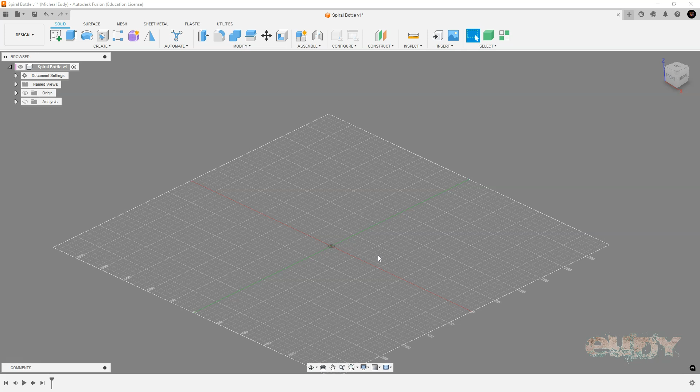So first of all, we need to make a bottle. So let's come in here and we'll do a sketch from the front and start off base here. Top of the bottle, and we'll go with something like this, and then we will...

Okay, then we're going to set a dimension on this. And I'm going to switch to inches. And so let's say this is going to be, I don't know, let's make it maybe, we'll say 10 inches. So we'll make it 10 inches.

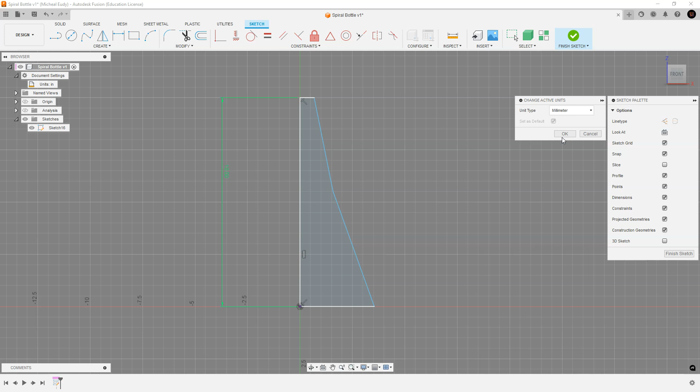All right, I'm going to switch that back to millimeters. And let's move it in just a little bit. Maybe move this in a little bit. And we need to fillet that junction right there.

Why is that giving me a hard time? Okay, I think I'm going to pull that in, so more about like that.

Okay, and then maybe fillet there. Okay, I like that. Then we need to put a fillet here.

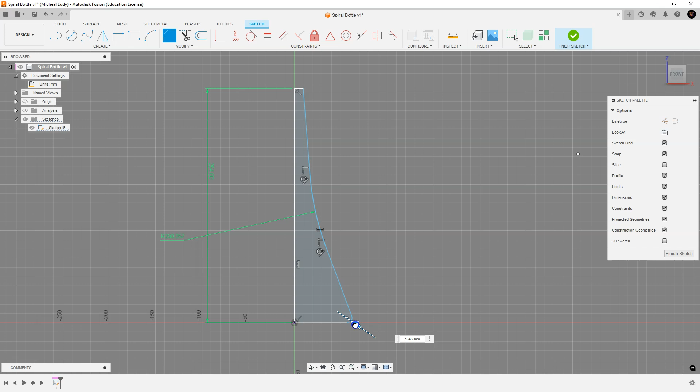As a matter of fact, I think what I might try to do is maybe I'll bow the bottom a little bit. So let's do a 3-point.

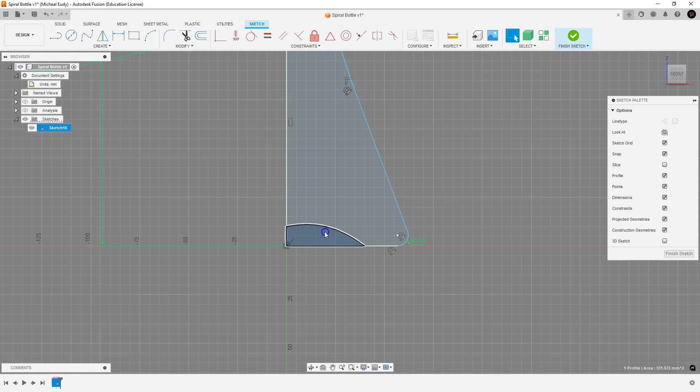Actually, we'll just do. Just do us a curve from here. Like this. I'll pull that down a little bit. Okay, we can trim out.

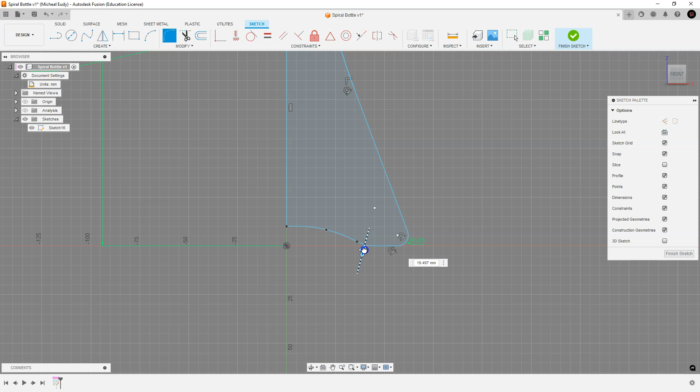And let's trim this one in there. And then maybe a little roundness right here. And that'll give us a good foot.

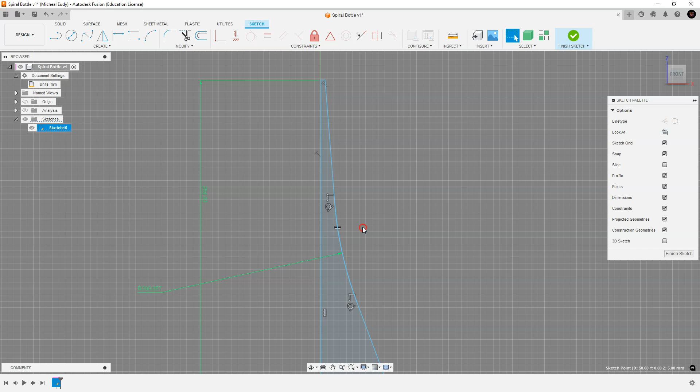Okay, so let's try that. Okay, I think I'm going to try for that. I'll always come back and adjust it later, so we'll finish that.

And then we're going to do a revolve. So, and pick our pivot. And so we got a bottle, something like this. Actually, I think that bottom's a little wide.

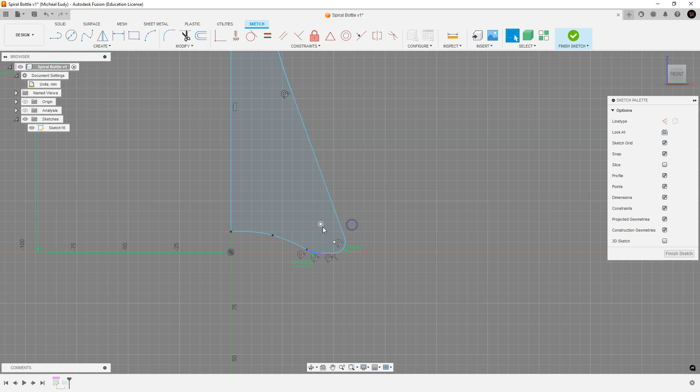Let's go back and edit sketch. And I want that. Maybe not as much. Oops.

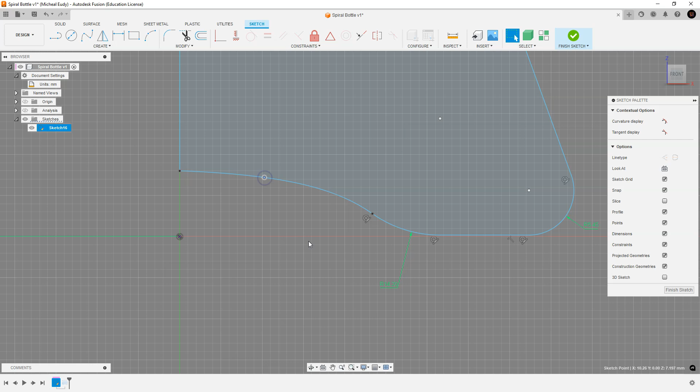By the way, if you hold down the control key when you're moving something, you can temporarily turn that snap off.

And maybe make this a little bit smaller. All right, maybe that. Yikes.

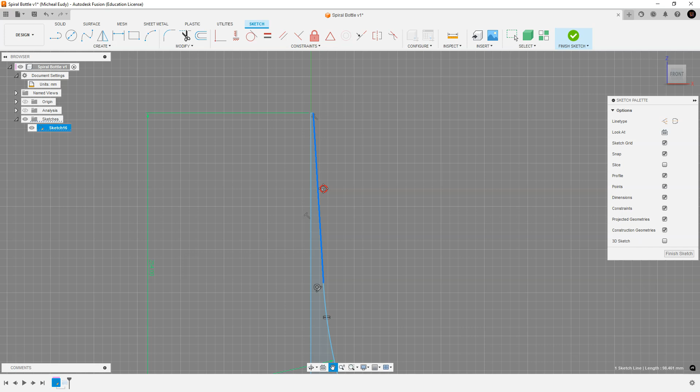I'm overly constrained here, so. All right, I think I'm going to go with that. Okay.

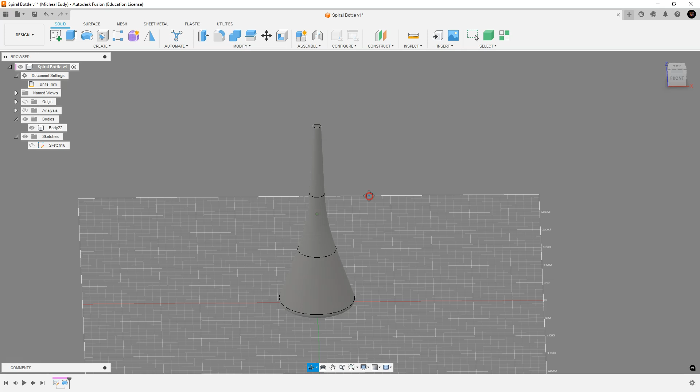So there is our bottle. Yeah, still think that's too skinny. Yeah, there we go. That's better. Okay, we'll go with that.

All right, now we got to cut a spiral through this. So to do that, we're going to create a new sketch from the front.

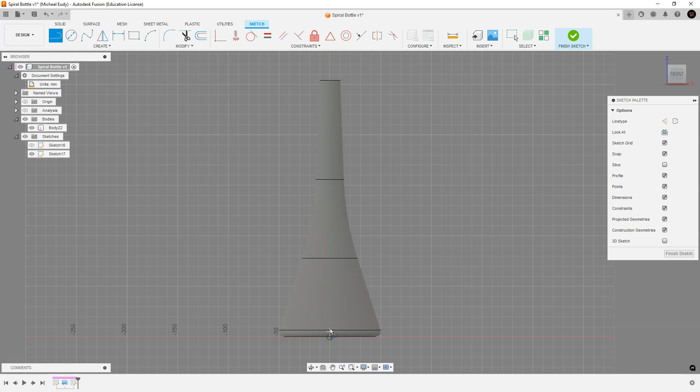And I want this sketch to be a straight line down the center. I want it to be past the bottom here, so I'm going to go right about here. And then I don't want it to go all the way top because this is going to be the path of the spiral, and I need space at the top where I can put some, actually we'll just extend it.

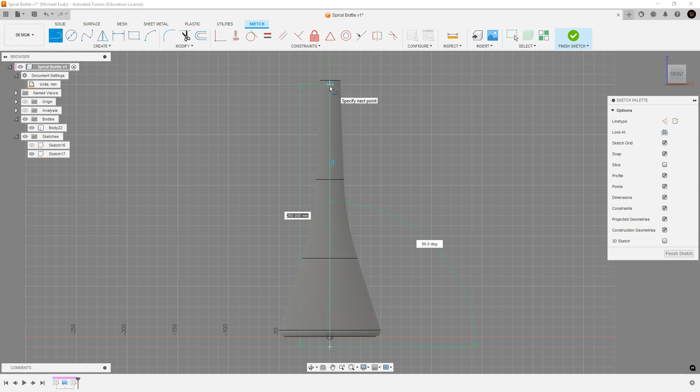So we'll go right about here. I don't want to go all the way top, and the reason is that I'm going to extrude the top up to put the threads on it. So I don't want it to hit this top piece. So I'm going to go right about there.

All right, so now I need to put a line out here, and I need this line to go out far enough that it's further out than the bottom. Okay, it's got to be further out than the bottom. It can go too far out. So, you know, it's okay if it's further out. Something like this.

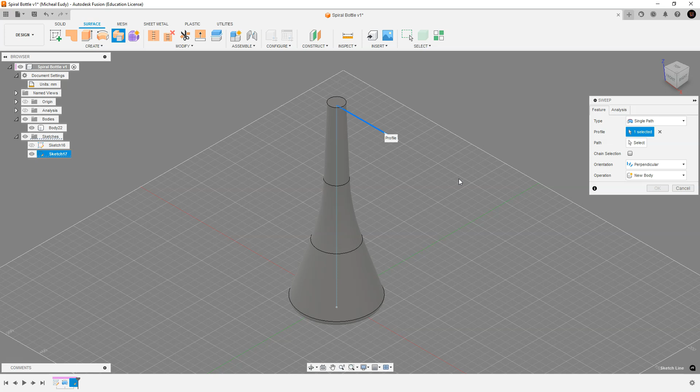That looks pretty good. All right, so now what we're going to do is we're going to use a sweep for this, okay? But what we're going to do is use a sweep not with the solid modeling tools, which is in here. We want to be with surface here, and we're going to do a sweep. Okay, so it's going to pick the profile, which is this, and then the path, which is this, and then it's going to make me a sheet that goes straight down.

Now the trick is that I can twist this sheet. So over here, you'll see there's tools for a twist. And so if I type in something like 360 degrees, it's going to twist around it.

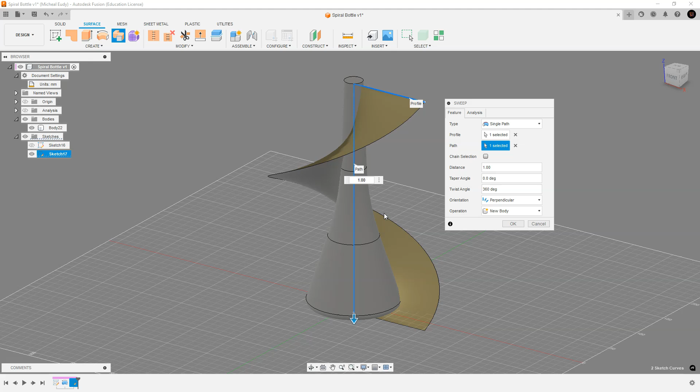And I'm going to do 3,600. It's just according to how many grooves you want to cut in it. Maybe that's too many, let's go 2,400. And so you're doing this spiral, and that's where we're going to cut into this.

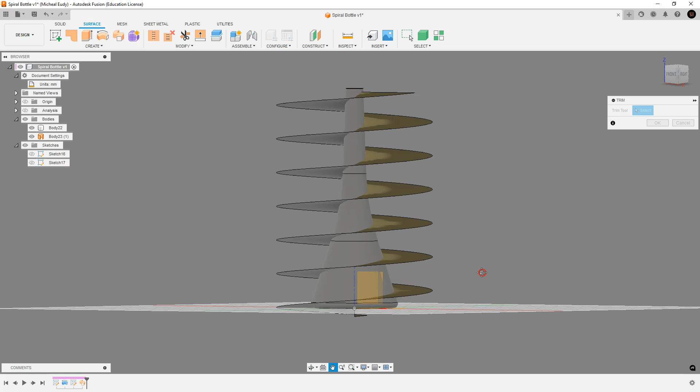All right, we're going to click OK. Now, while we're in this surface modeling, we're going to go here, which is trim, where we can trim this. So what we're going to do is pick the centerpiece. Now, yours might be able to pick the whole thing, but it might go in pieces. Okay, so I'm going to pick that, and then I'm going to pick this, and I'm going to hit OK, and it's going to trim that. So it's going to trim it up to the edge of it.

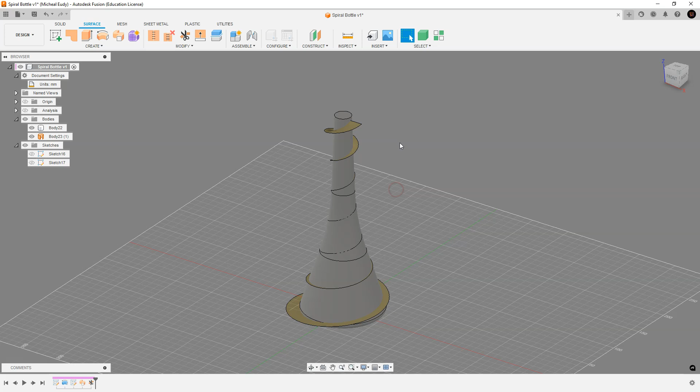Now, we may have to do a trim a couple of times. So we may come in here, repeat this, and pick this top one, and then pick this, and cut it off there, and then we got the bottom one too. Let's turn off this grid for a second. So I'm going to repeat that, pick this, and then pick this, and then that'll cut that all the way through there.

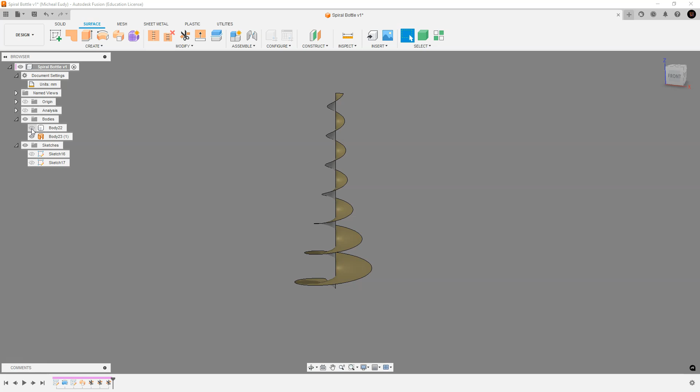And that'll be fine, that's going across it there. This piece out here will be fine. Okay, so what that's done is created us a little spiral. We can hide the body here. We created a little spiral in which the edge of it will match right onto the edge, matches our shape here.

So now what we're going to do is we're going to create a new sketch, but we want to do an offset plane to sketch on. To do that, what I'm going to do is do a construction plane, but I'm going to do a plane along a path, and then I'm going to pick this path, and you will notice that it broke right here.

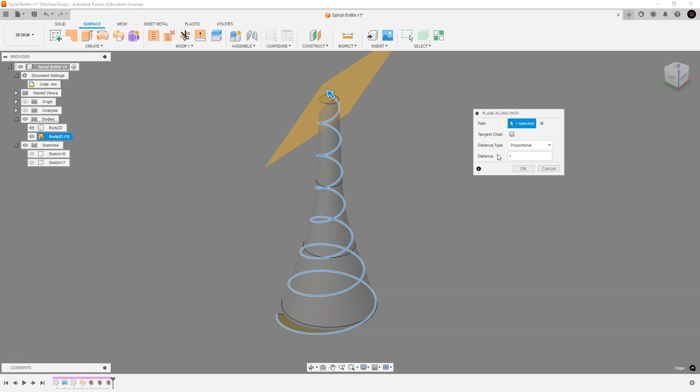So I'm going to hold down the control key. I need to pick the whole path. I'm going to pick control here. Make sure you've got the whole path picked. And then on our distance here, we need it to be 1, which means it's going to put it up there at the top. So it's putting us right up there where this starts, right at the tip of where the spiral is.

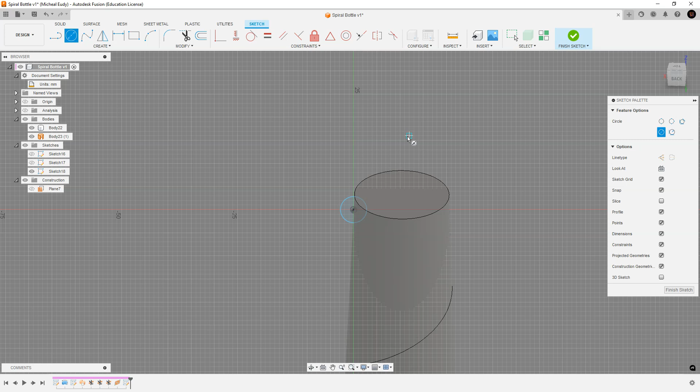So I'm going to create a new sketch, and it'll be at the 0, 0 right here. And I'm just going to create a circle right here. And we can always come back later after we do this and adjust the size of this circle if it's too big for the cut. Okay, so we'll finish that.

All right, so now what we're going to do is we're going to go to solid modeling now, and we're going to create a sweep. Now it's going to want our profile, which is this circle, and then it's going to want our path, which is this. And I need to make sure I hold the control key, and then I pick the entire path.

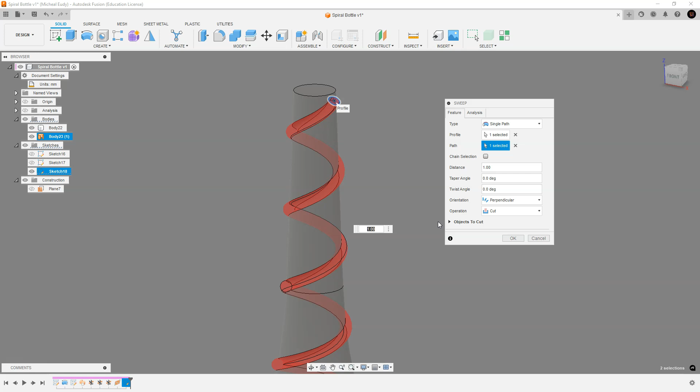And then it's going to cut through it. And that's probably fine. I'm going to click OK. And then that's cut into that in a spiral. And we can turn that body off now.

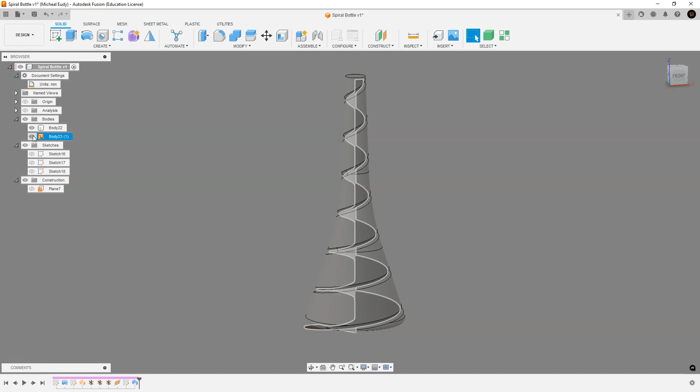All right, then we want to pull this up a little bit. It's going to be a little close there, maybe that. And then I need to put fillets on this, so I'm going to right-click a fillet, and that'll go all the way down. And I have no idea how big this is, so it's going to need to be much bigger than that, so maybe 1. Might go a little bit bigger than that.

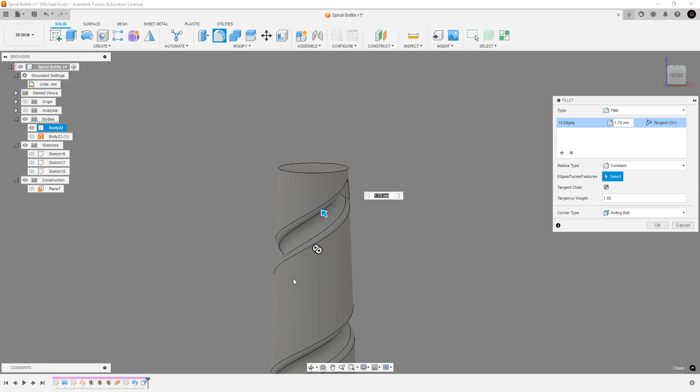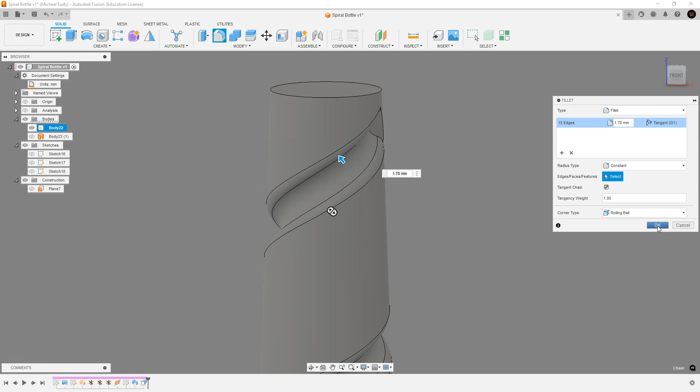Yeah, I think I'll leave that. Put that in. Then I'll need to put a little fillet on this, around this. So what we want to do is there's kind of a sweet spot where we get rid of that flat spot in there. So let's see what it is.

Just a hair over that. Oh, you dog. Too much. So sensitive.

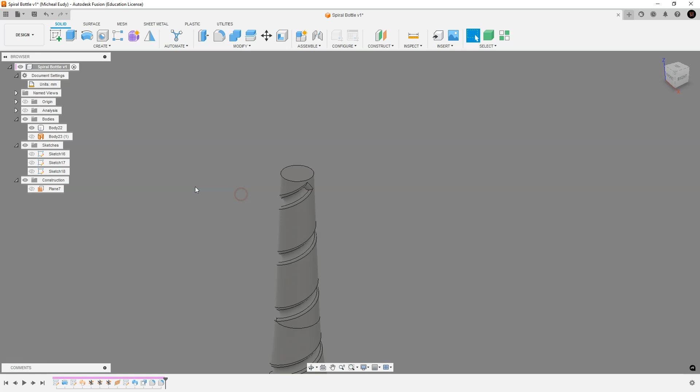Okay, and then we would come in here and extrude for the top. And initially, I would say don't join this - make it as a new body. We'll join it back in a second.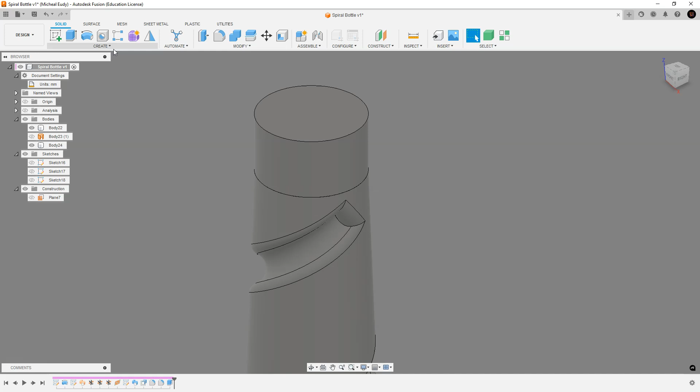All right, I need to create a sketch on this top. And the reason we're doing that is we need to put a point on that. And then we're going to create a thread here, model there. I'll go ahead and leave that on the default right now. We need to put a - oh, I already have it in here.

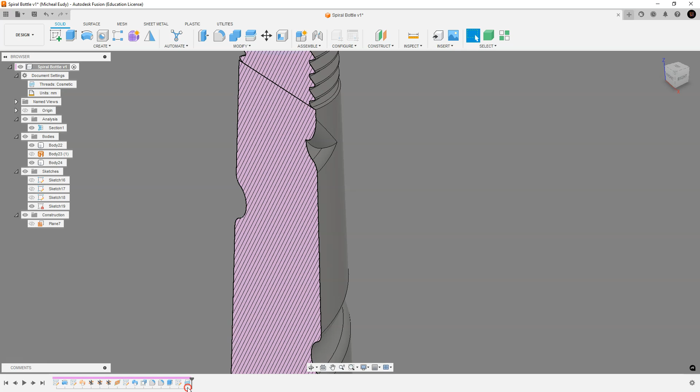We need a section analysis. Okay, I need that so that I can tell how far we're pulling it out.

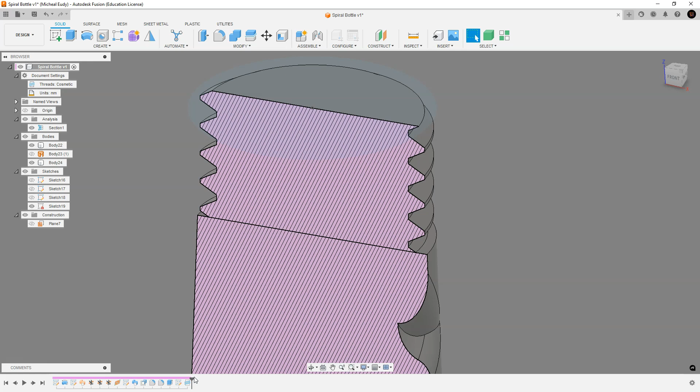And actually, I think what I want to do is hollow it out first. So I'm going to roll that thread back and let's make it hollow, and then put the thread in.

So let's give it a thickness. And oops, I want the thickness - go here. Let's see how thick I want to make this.

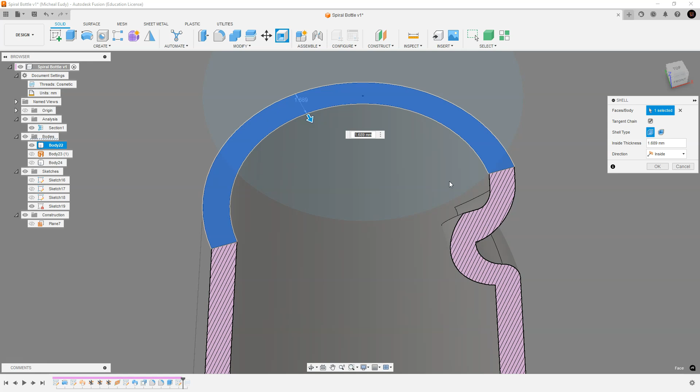That's not bad. Let's make it something that we can remember. We'll go 1.7 so we can remember what it is. And click OK.

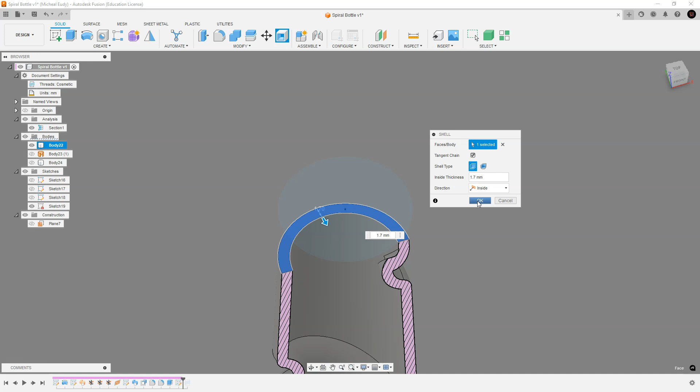And then we'll do the same to this one - and 1.7.

Well, I can't do that. All right, we're going to just delete that. And let's do an extrude from this surface.

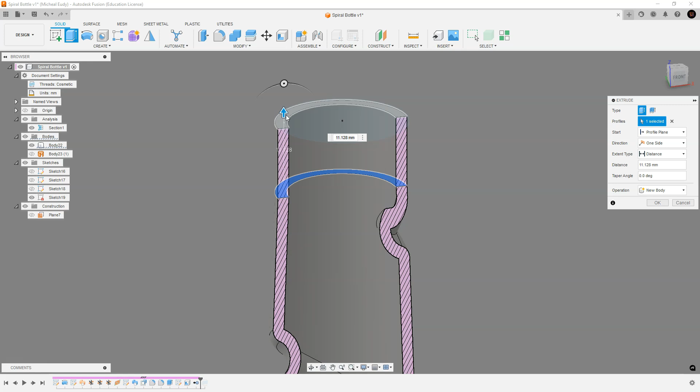And we're going to do it as a new body - yeah, that's what we want to do. Okay, that'll work better. All right, so now let's put our threads on it.

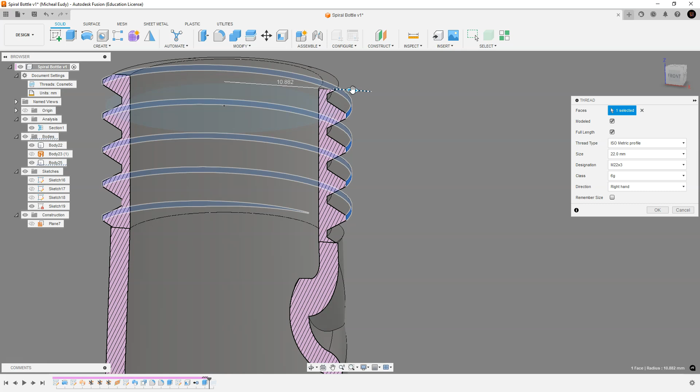All right, so now we need to pull this out. I want it a little bit bigger. It's too much.

That looks pretty good. All right, let's go with that, because that will work with our liquid.

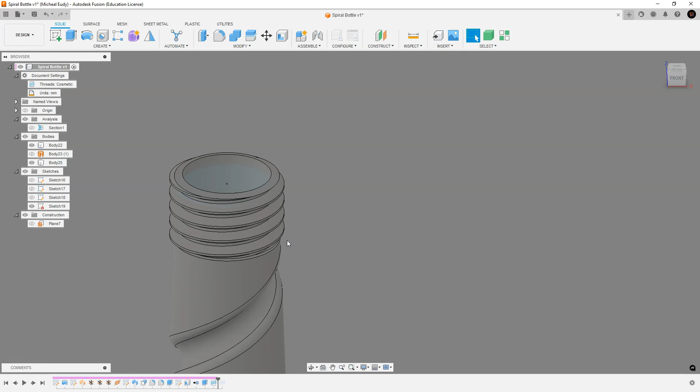Okay, then we can join these, this one and this one. And we want it to be joined, not cut. Click OK.

And it didn't join it, and the reason is - let's try it again.

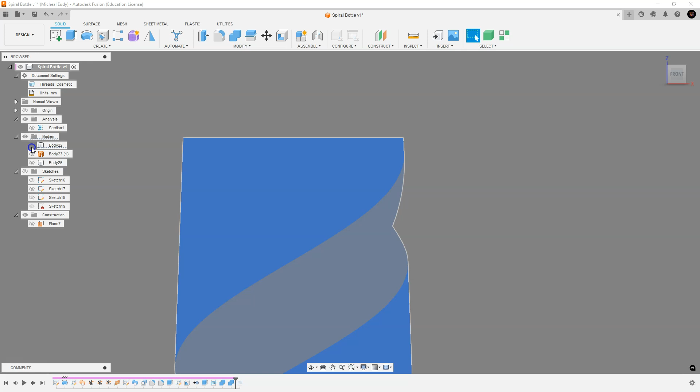Okay, the reason it's not joining is that there's a little bit of a gap in there, so what we're going to do is go to move. Go here.

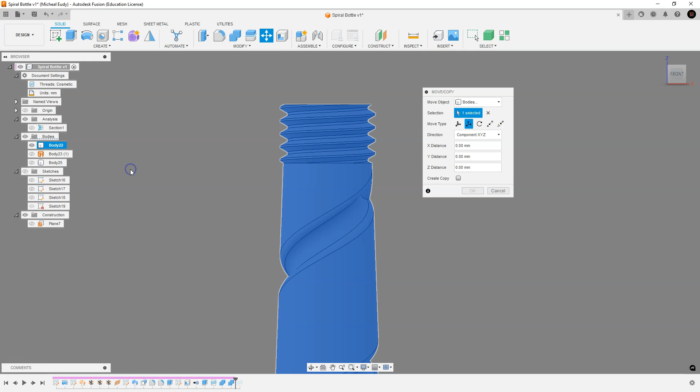Oh, it did join it. All right, it made me a copy of it, is what it did. Okay, here we go.

All right, let's take it over here and let's look at it. Go to our render settings.

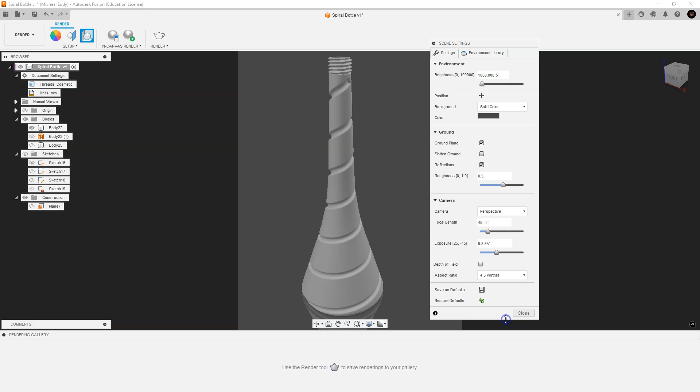That's a tall bottle. Let's go here. We got it on the... that's probably all right. Let's hide this down here.

And let's put a glass on this. Okay, let's see what we're getting here. Okay, that's looking pretty good.

All right, let's go make liquid for it.

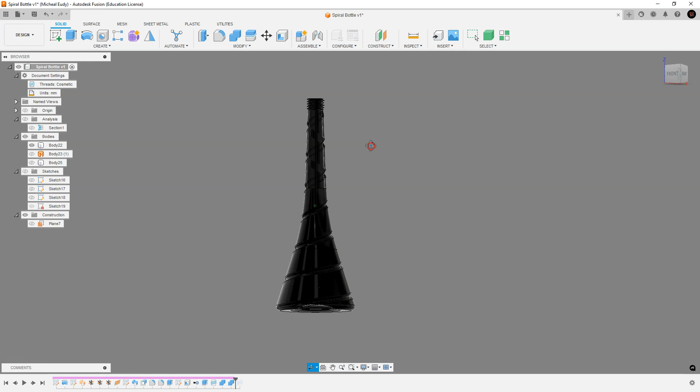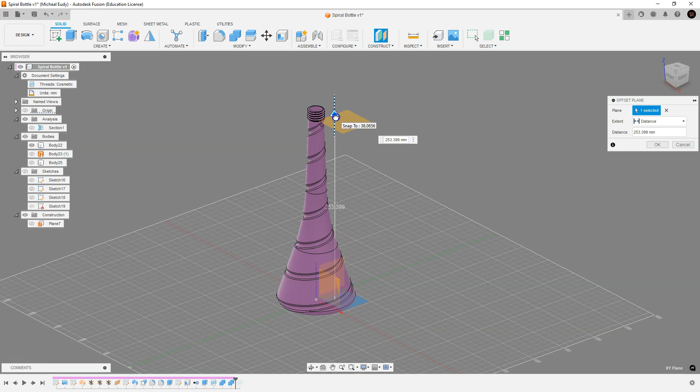Okay, let's turn on our color here, and then we're going to make us an offset plane from the bottom to where we want the liquid to go to.

That's probably okay right there. Okay. Yeah, that'll look good. Okay, so we're going to do a boundary fill.

So boundary fill - pick the top, pick here, and then we're going to select the cell that we want, which is this top one right here. And click OK, and that'll make us our liquid.

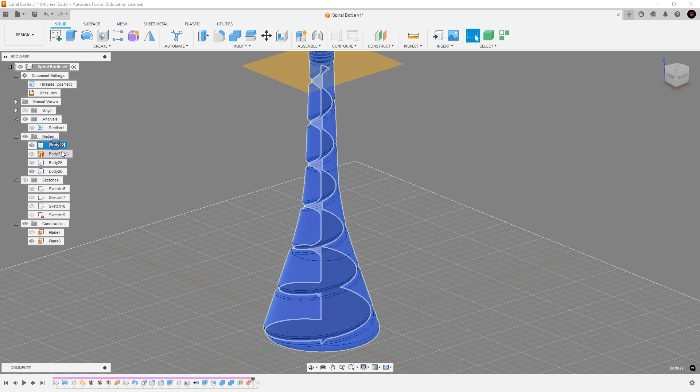So this is our bottle, and this is our liquid. All right, so...

It's kind of odd how it didn't fill it in - it just kind of cloned it. All right, so let's see how we're going to fix this.

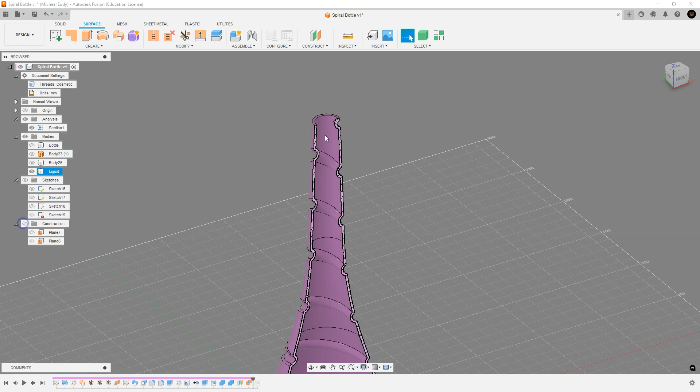Okay, this is what we do. Go back to surface - we don't need that construction plane anymore. So what we want to do is delete the top, and that'll give us an inside and outside.

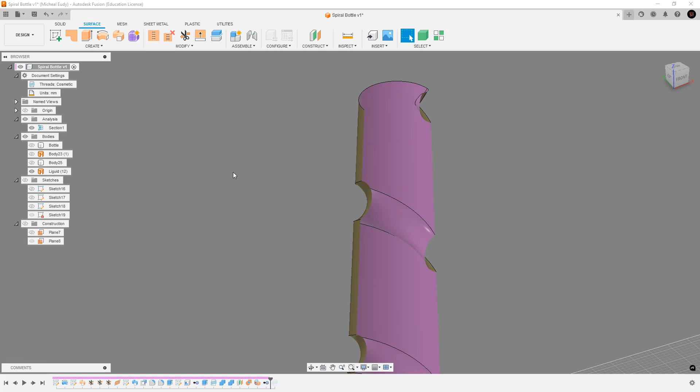So that's the inside, so we don't need this outside, so we can remove that. Let's turn off our section analysis.

And so then we want to cap this, so what you want to do is put a patch on this. So pick that and patch it. And then we need to stitch it - where we stitch this and that, it'll turn green, and we'll stitch that together. And now we've got the inside part.

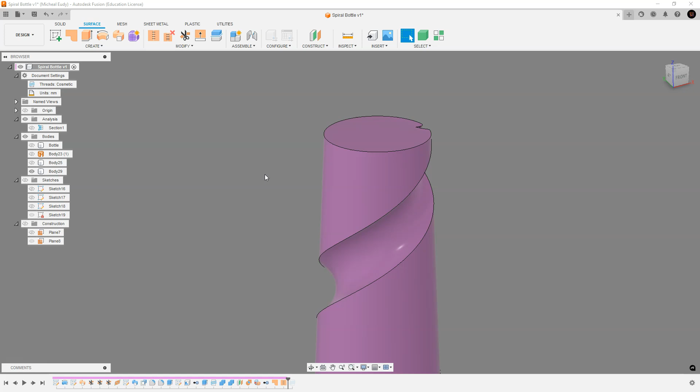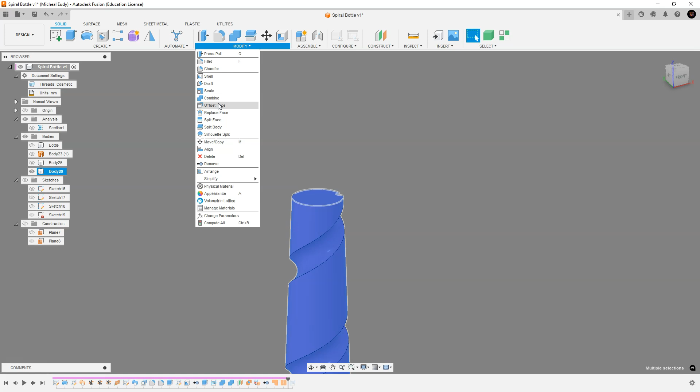Okay, so we want that to swell out now. So we're going to pick everything, but then hold down the Shift key and deselect the top. And we want to be in solid, and we're going to do an offset face, and then we turn the bottle back on and our section. And let's look at it from the front. It's getting close here.

And I'm not sure how much we'll want to offset this. Oops, that's way too much. So it's going to be like maybe a little bit more than that, maybe. I kind of think of it that you want to be in the center and then not quite as much. So that's pretty good right there.

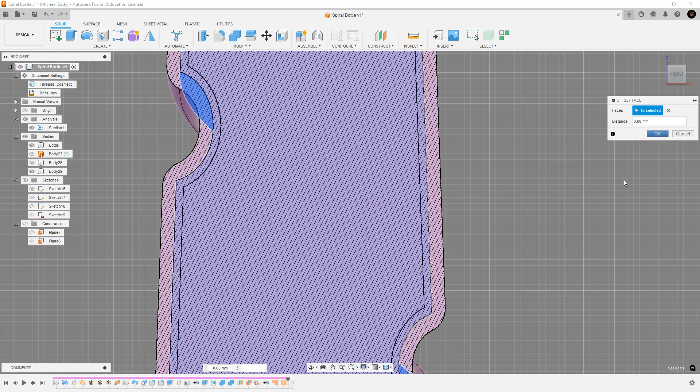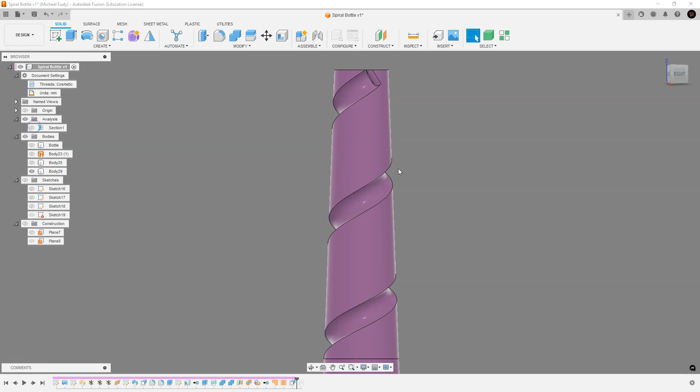Okay, let's hide the bottle. I don't like that sharp. I wonder why it didn't give us our fillets. Okay, let's set that in. Okay, so that's soft too. Okay. All right, let's do this. We'll make this a little bit easier.

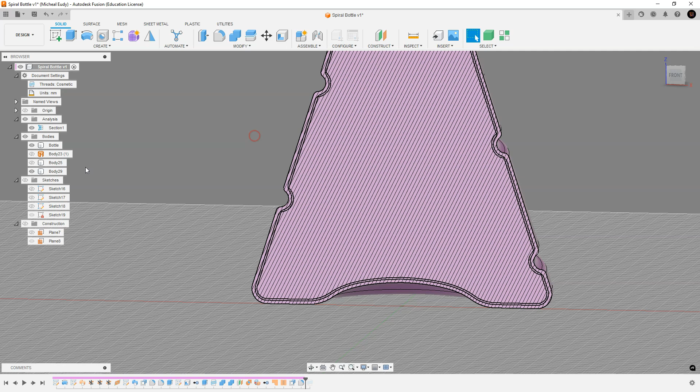If I take this liquid and I right click on it and tell it to make a new component, it'll put it down here by itself, and then it'll be a different color. Okay, that looks pretty good. Now we just need our meniscus on the top. So we go to surface here, offset, pull it up some, and then we need to thicken this, make it really thick.

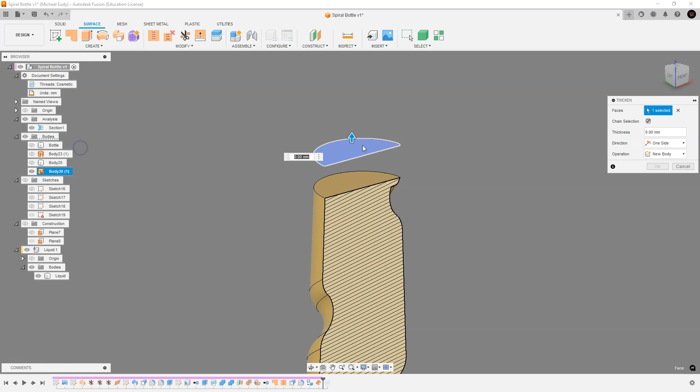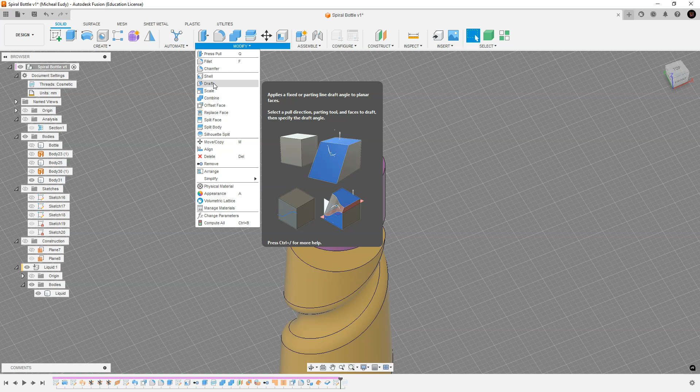And then we want to scale that out a little bit. So we want to do a sketch on the top and create a point right in the center. Finish that. Then I can go back to solid, scale, pick this, pick center point.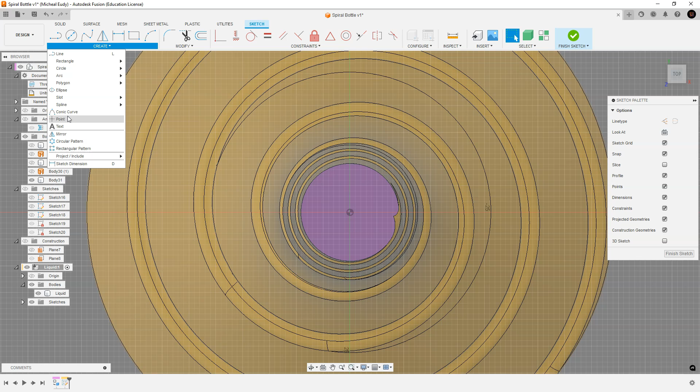What we need to do is, let's make this active here so the sketch is on it here. Okay, then scale. Select this, and I want to scale it from its center. And then pull it out. Doesn't have to be very much, just a little bit. And then we can fillet this.

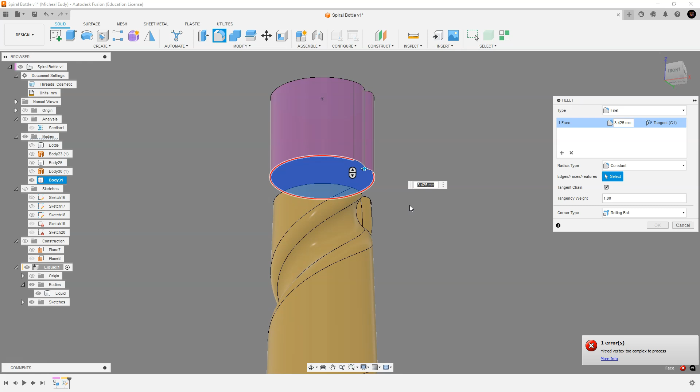That's going to be a problem. I bet you I can't fillet that. It's going to be a problem that I let that hit that edge. Can I not just do a press pull on that till I get it above that? Yeah, that's what I should do.

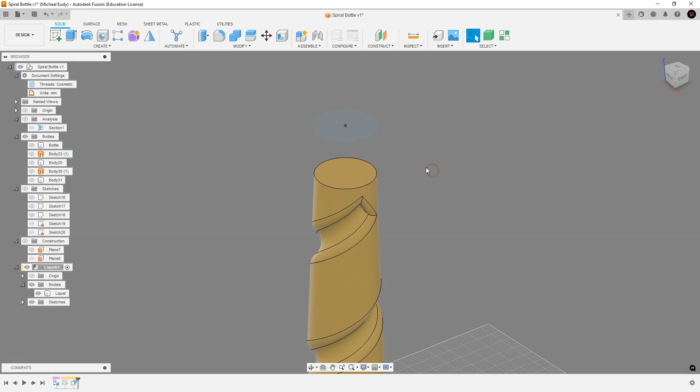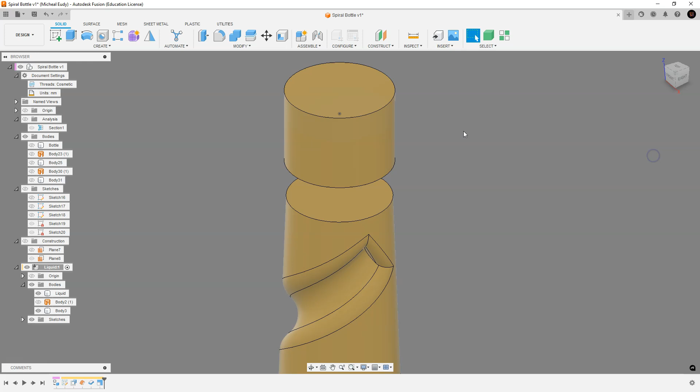All right, let's do that again. Surface, offset, thicken, solid, scale this from that pivot point. Scale out a little bit. And then fillet this. Big fillet. Alright, then I'm going to squash this. So I'm going to scale again. And I'm going to make a non-uniform scale from this point. I can squash it a little bit.

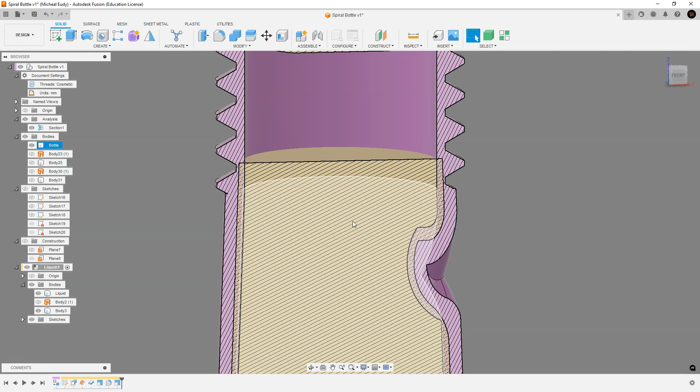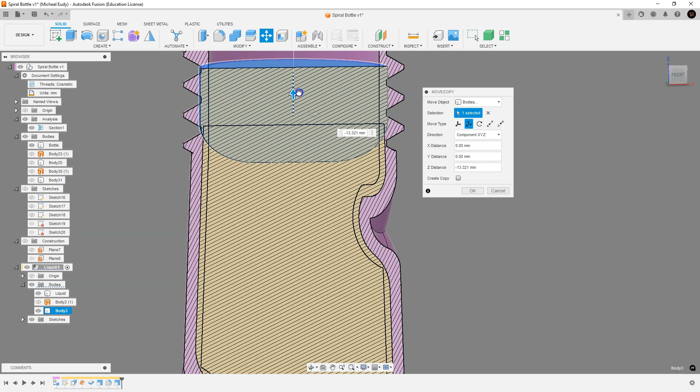So my question is, is that going to clip in? Nah, it's probably fine. All right, let's move this so it clips down into that. Boy, it's going to be quite close in there. Let's move it down. Maybe like that. All right.

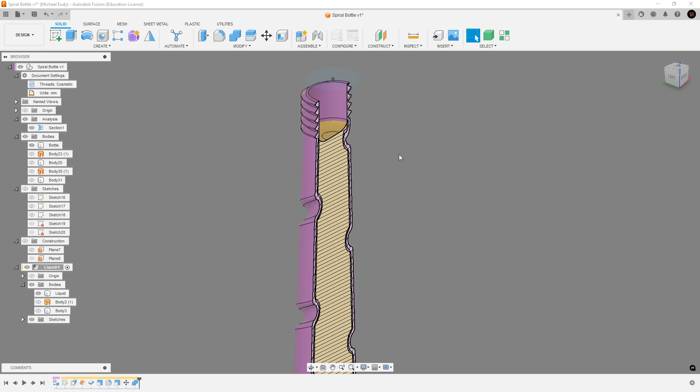So let's combine this one and that one with the join. And then I can. All right, so now there's our meniscus in the bottle. Yay! We're not clipping into anything there. All right, let's go back to render. And let's turn off the sketches.

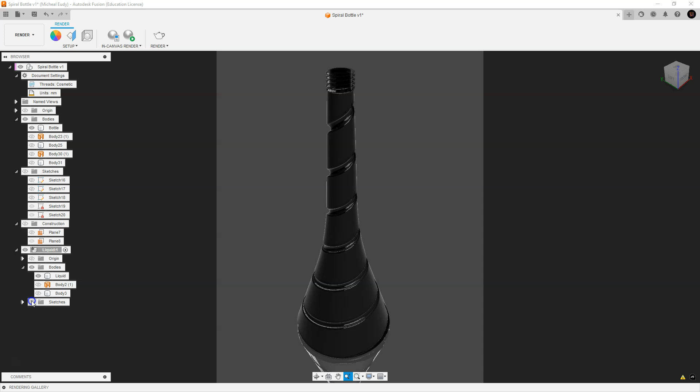All right, so maybe about a 60 on our focal length. I know a lot of them default to 90. We could go with that. All right, let's make us our liquid. So let's go glass color. Let's go with this one. That's going to go on this. And let's start rendering.

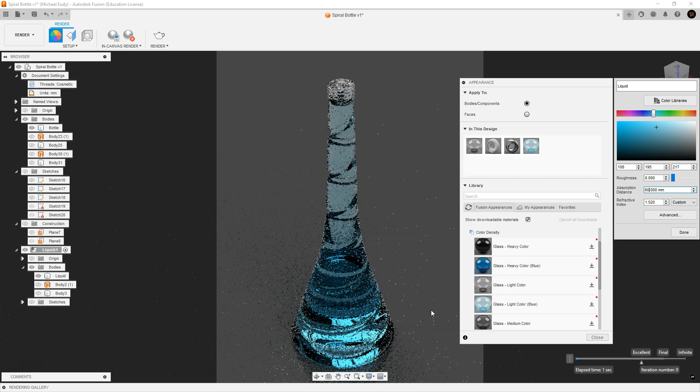And this is going to be our liquid. And this is going to be our glass. And on our liquid, let's go... I don't mind the blue. It's not bad. Let's make it a little bit more dense. Let's go maybe 60. A little more dense.

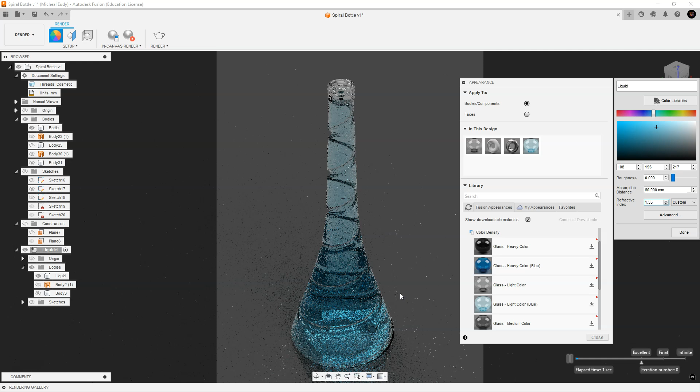And maybe 1.26. That's probably too low. Actually, I like that. Maybe just a little denser. And let's save us a named view here. This will be our main camera. All right, I'm going to pause it while it renders.

Okay, so there you go, final rendering. And that's how you can approach doing a spiral cut into a sloped bottle. All right, hopefully it helps you.